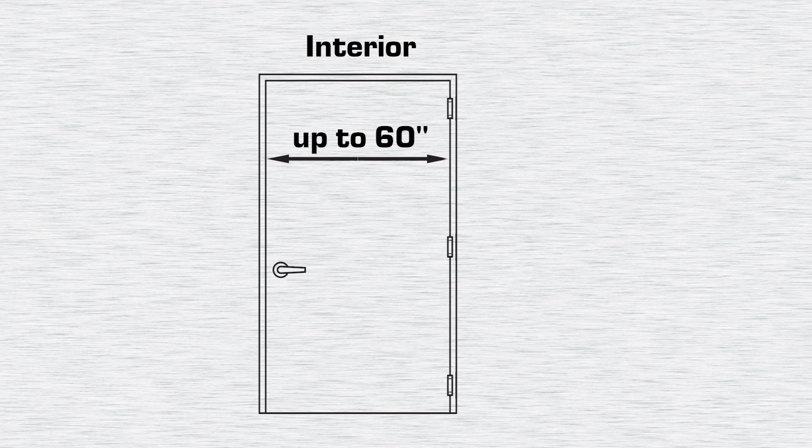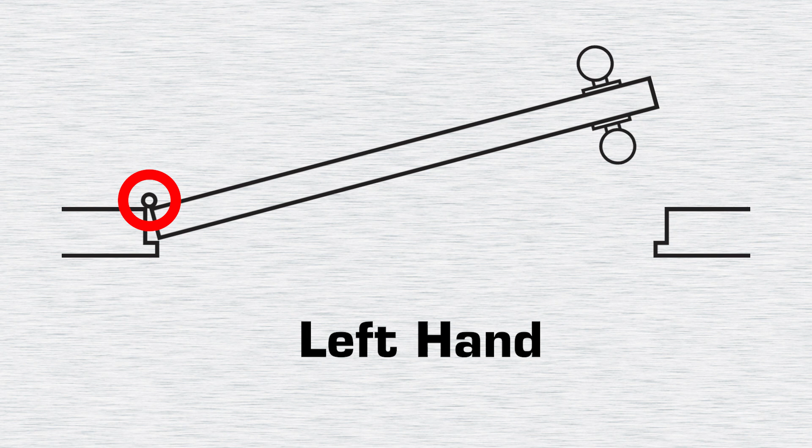To determine if the door is a right or left-hand door, while facing the push side of the door: if the hinges are on the left, it is a left-hand door. If the hinges are on the right, it is a right-hand door.

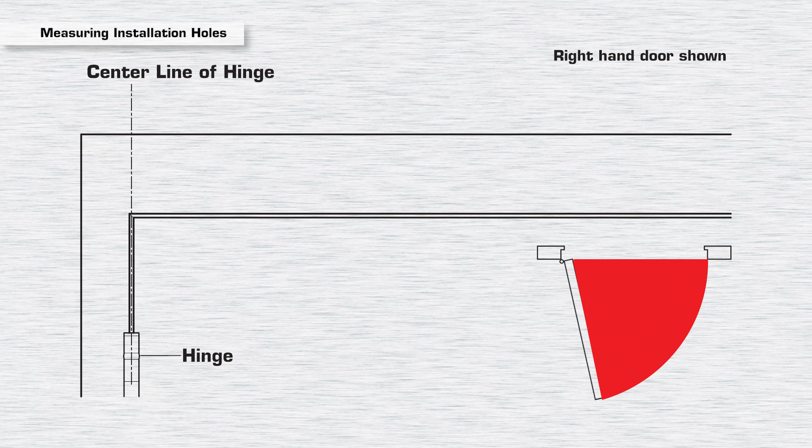To mark your installation holes, first, on the pull side of the door, determine the maximum degree of door opening. For up to 100-degree opening, from the center line of the hinge, measure 7 1/2 inches. For up to 130-degree opening, from the center line of the hinge, measure 6 inches. For up to 180-degree opening, measure from the center line of the hinge 4 1/2 inches.

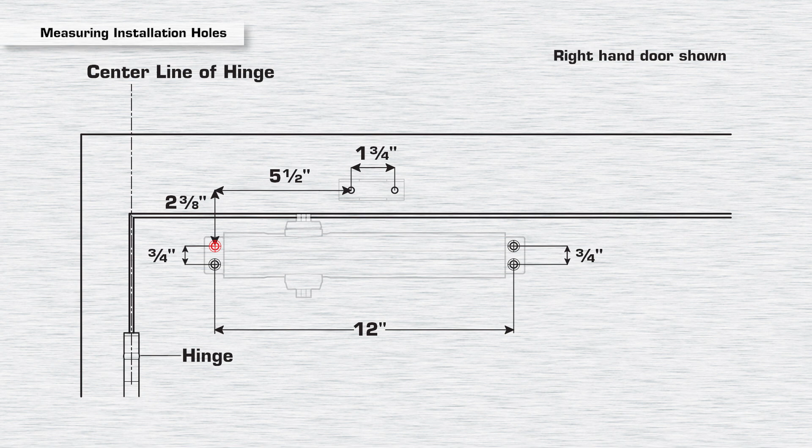Then, using that mark as a guide, from the bottom of the door jamb, measure 2 3/8 inches down to mark your first hole. Use the following dimensions to measure for the remaining hole locations. Note, the same dimensions apply to left or right-hand doors.

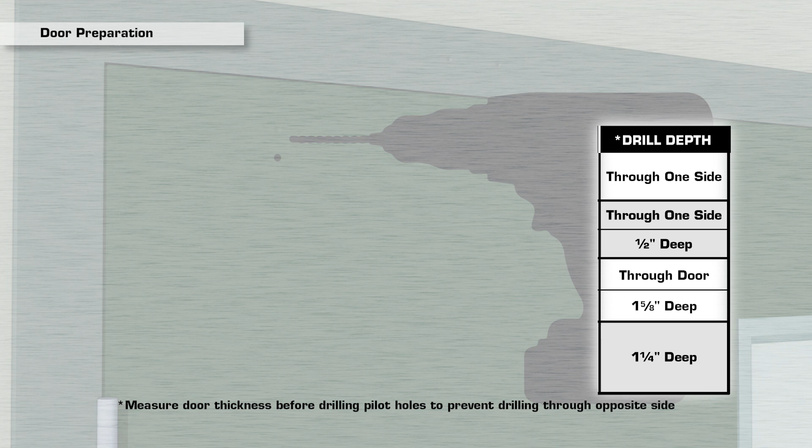Use a hammer and punch to mark the center of each screw hole. Using the chart, select the appropriate drill bit based on the type of fastener, your specific door material, and application. Be sure to drill the holes at the specified drill depth to prevent from drilling through the opposite side.

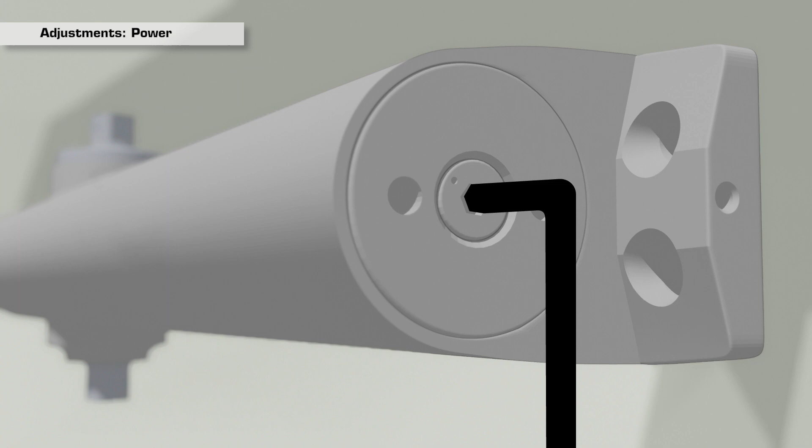Before installing, using the included Allen wrench, turn the power adjustment screw clockwise to increase power or counterclockwise to decrease power. Adjust the spring power of the closer based on the degree of opening and the door width as shown on the chart.

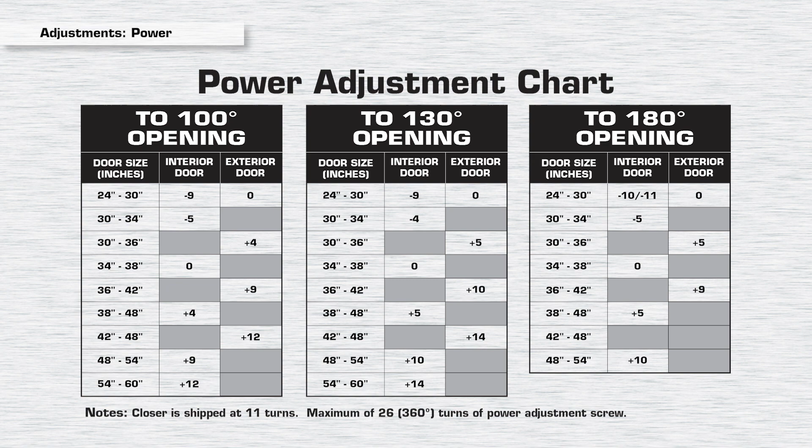Disassemble the forearm from the main arm by removing the elbow screw and both washers.

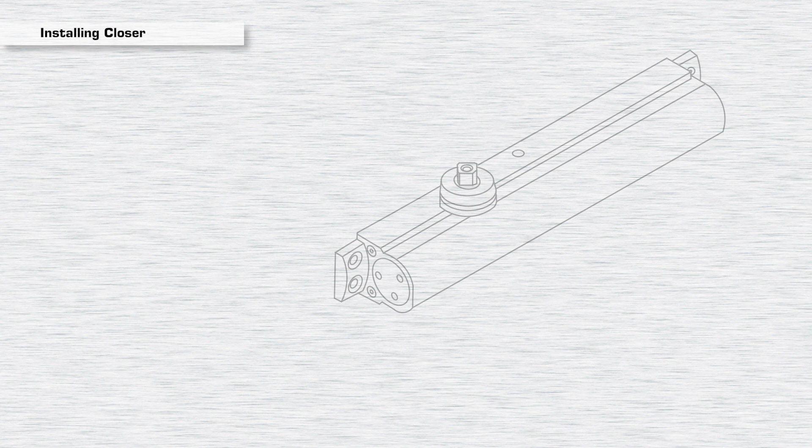Keeping in mind that the speed regulating valves labeled 1 and 2 will need to be positioned facing the door hinges, position the closer body over the drill holes on the door and fasten with 4 flathead screws.

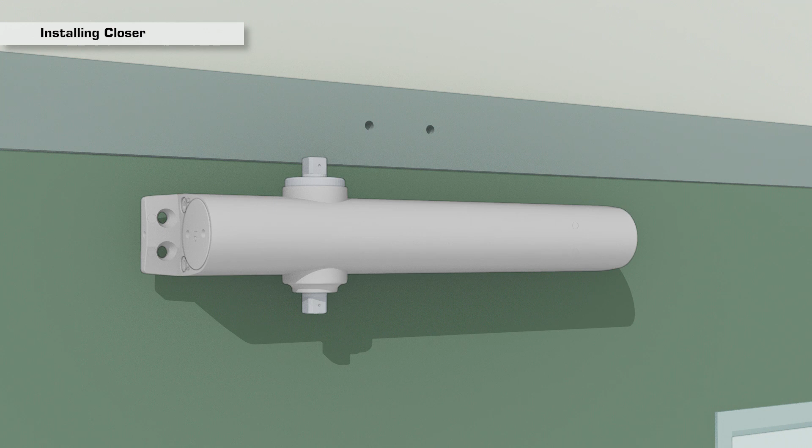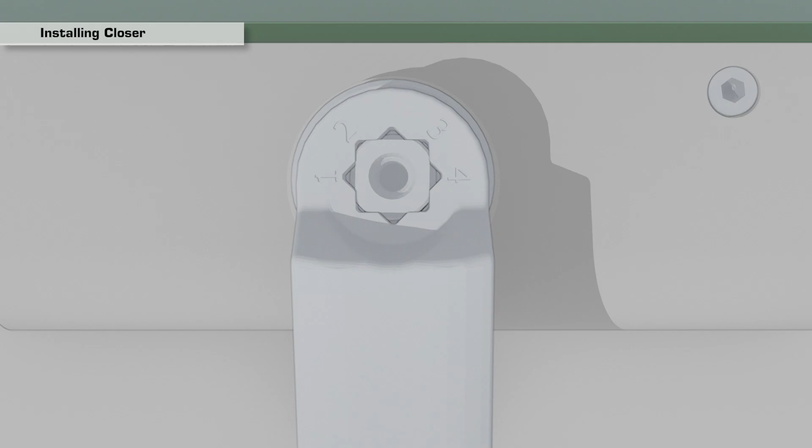Place the main arm onto the top spindle of the closer body, aligning the pinion flat at the base of the main arm as shown, and fasten with the main arm screw and large washer. Then position the forearm shoe over the drill holes on the jamb and fasten with 2 roundhead screws.

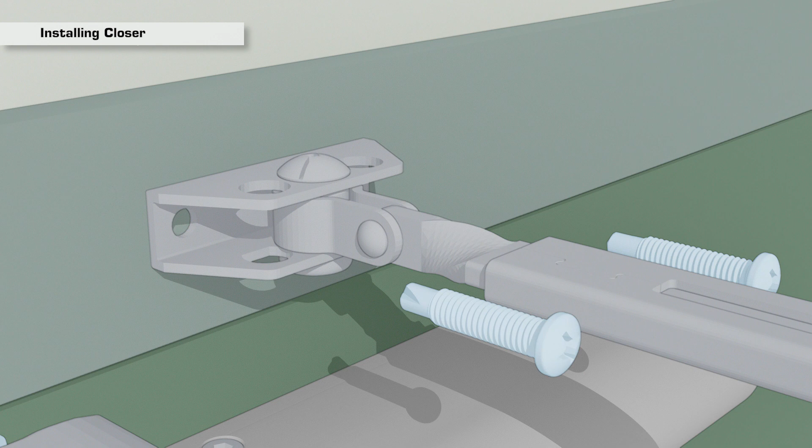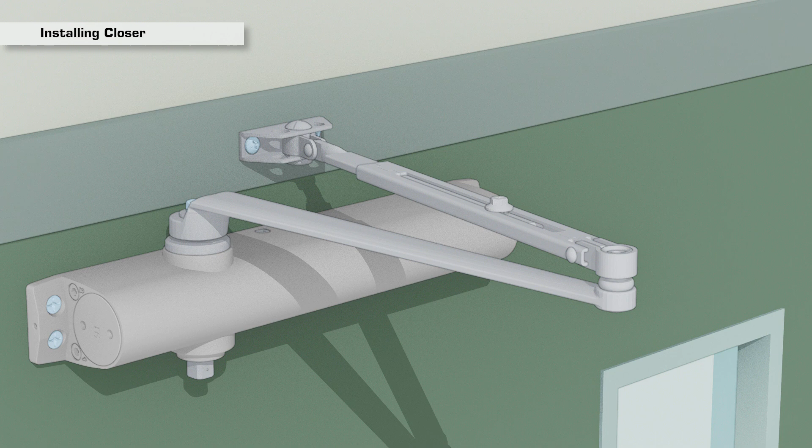With the door closed, reassemble the arm. Bring the main arm and forearm together at the pivot point and fasten with elbow screw and both washers. Adjust the length of the forearm so that once connected to the main arm, it will be perpendicular to the door to ensure a proper preload. And tighten the forearm screw to secure.

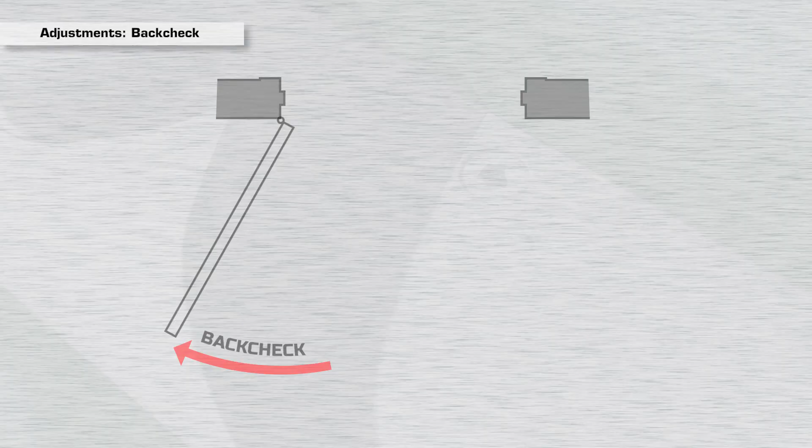To adjust the backcheck, which is the resistance to door opening when nearly fully open, turn the screw that is next to the pinion shaft, clockwise for more opening resistance, or counterclockwise for less opening resistance. Never close the backcheck valve completely.

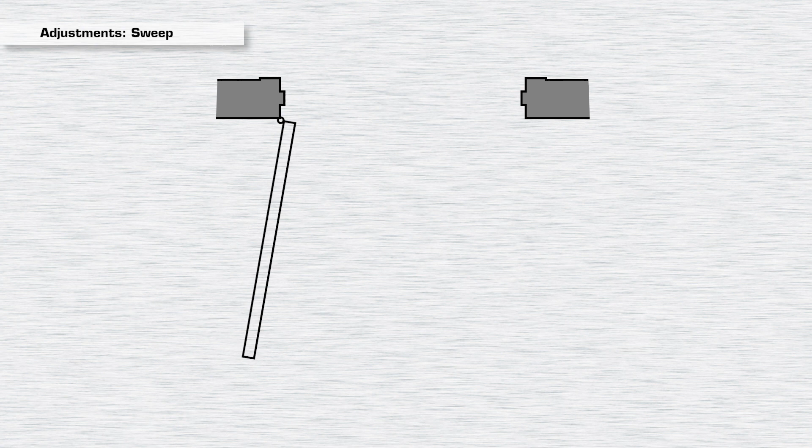To adjust the speed of the sweep, which is the closing speed from the door being all the way open, turn the screw labeled 1, clockwise for slower,

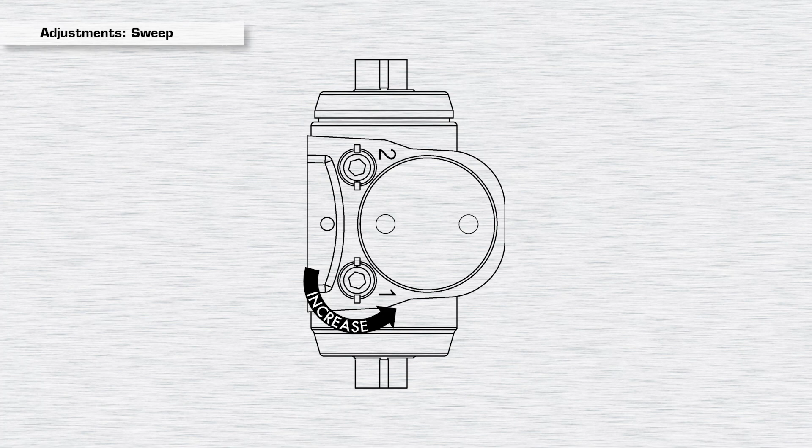or counterclockwise for faster. To adjust the latch closing speed, which is the closing speed from the door being about 20 degrees open to completely shut, turn the screw labeled 2, clockwise for slower,

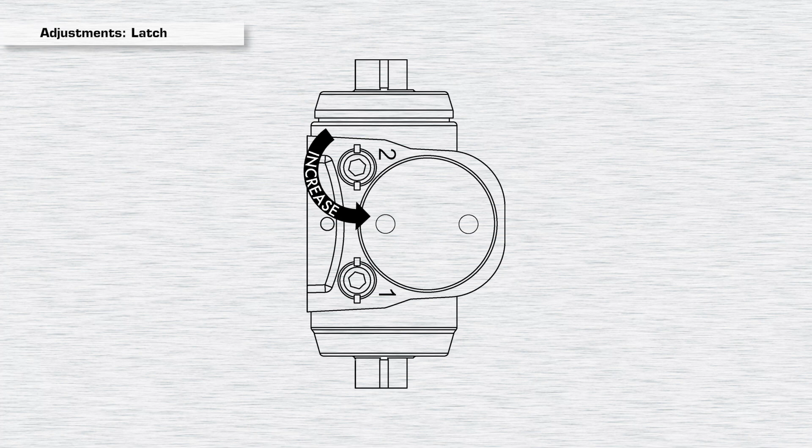or counterclockwise for faster. Be careful not to back any of the valves all the way out or a leak will occur. Place the cover on the closer body and fasten with 2 screws.

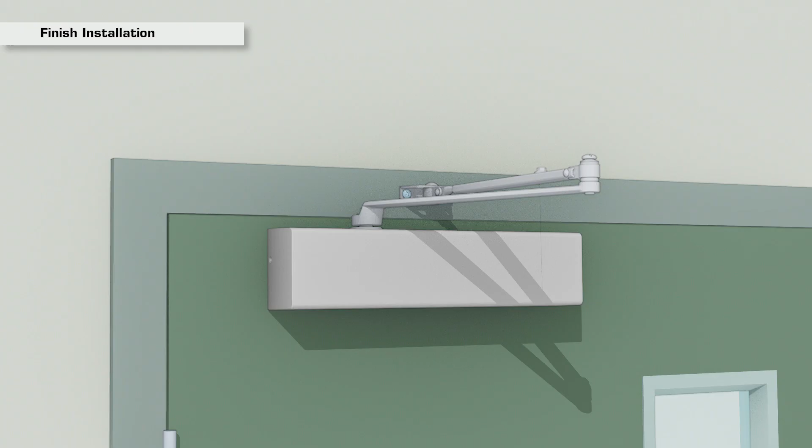Your new Universal Hardware closer is now ready for use.